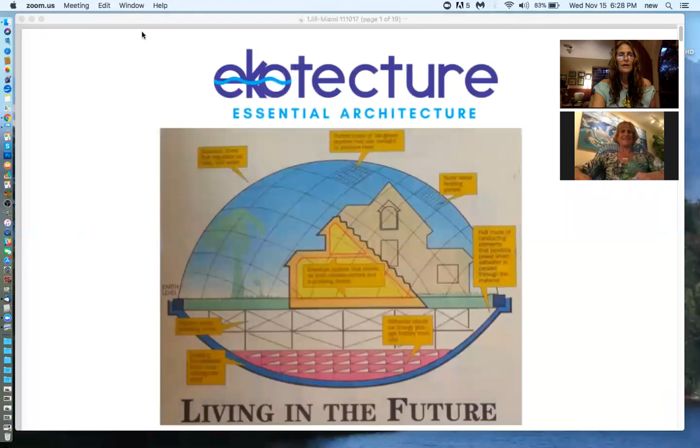They may be a little far out. Well, let's go ahead and look at some pictures, shall we? Please, a picture's worth 1,000 words. Okay, yeah, there's simple drawings right now, and I can show you some models as well. Great, I'll go through the screen sharing process here. Just give me a moment.

Let's see. View full screen. There we go. Okay, so I'll let you go ahead and just talk us through this, and you tell me when to move the slide ahead. What a beautiful picture, just looking at the details in this. Yeah, well, unfortunately, I can't read all the writing, but I'm just going to give you an overview without being able to read it all anyway.

So this is an alternative construction for the future of humanity and the planet. And I'm calling the individual homes eco-arcs. So they potentially involve all of the alternative energy systems that contribute to the whole: solar hot water, gravity geothermal, gray water recycling.

Black water recycling, that is taking the toilet waste and creating a usable fuel from that, or creating a usable fertilizer for the internal garden, because there's a garden which feeds the entire system inside of the house, as well as an aquaponic system which provides potentially protein for the entire house.

What you see on the diagram, if you want to point to that blue line that goes at the bottom of the hull of the boat, I'll call it, the blue line there is actually a water jacket. Okay. So the salient feature of the boat, of the ark, is that it floats.

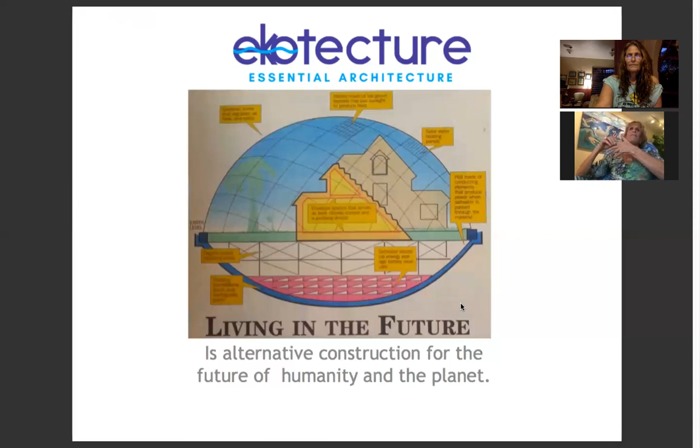Let me see if I can go the right direction here. Is that the right direction? Let's see. Well, is that the second slide? Does it say?

My architect of recent years has designed these houses to be hexagonal. My husband specified that they be elliptical, but my architect of the last couple of years designed them in a hexagonal shape modularly, with each of the components being hexagonal. Basically what each EcoArc does is it provides energy, conditions air, generates pure potable water, recycles waste for fertilizing garden and for cooking gas, and provides safe and comfortable shelter, as well as growing healthy, fresh food, plant and protein based, including an internal hydroponic and aquaponic system.

Move me in. Move me in. Move us all in. Move us all in.

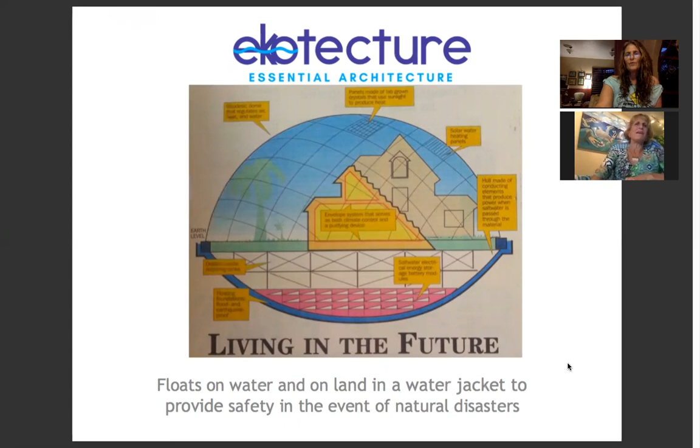So we have our same picture again that we had at the beginning, but living in the future, floats on water and on land in a water jacket to provide safety in the event of natural disasters. Here's pictures of all the natural disasters: tsunami, hurricane, tornado, flood, volcano, earthquake. And this house would be resilient in this kind of setting.

Yeah, the potential is there. Let's just say yes. The future is limitless, and we can design to protect against all of this.

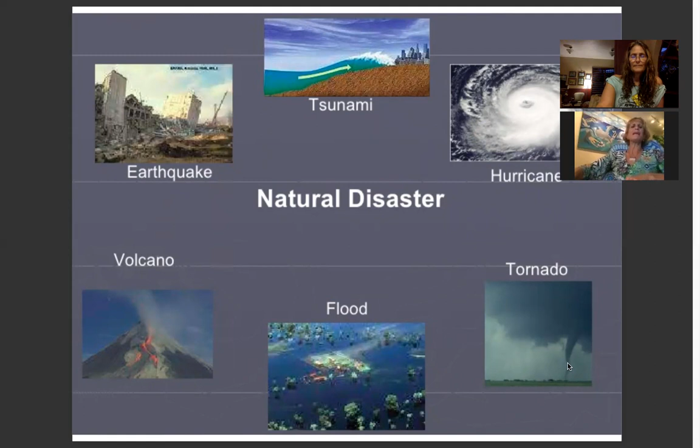This one says, Ekotecture utility systems are all based on natural systems without using combustion or friction. That's quite a statement. What you're seeing here is a cross-section, a plan of the hull of the boat, of the hexagonal one. Those lines you see internally are a series of tanks. If you look very closely, you'll see the hexagon within them. It looks kind of like a honeycomb, really. Exactly, and that's what it is. The honeycomb, of course, my husband said it was the strongest way of constructing, a hexagonal construction.

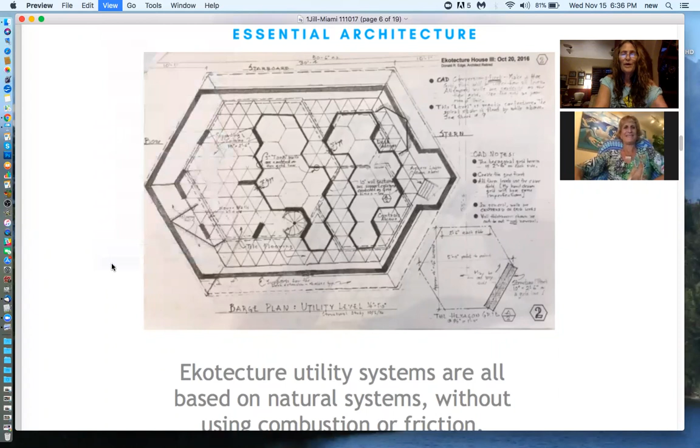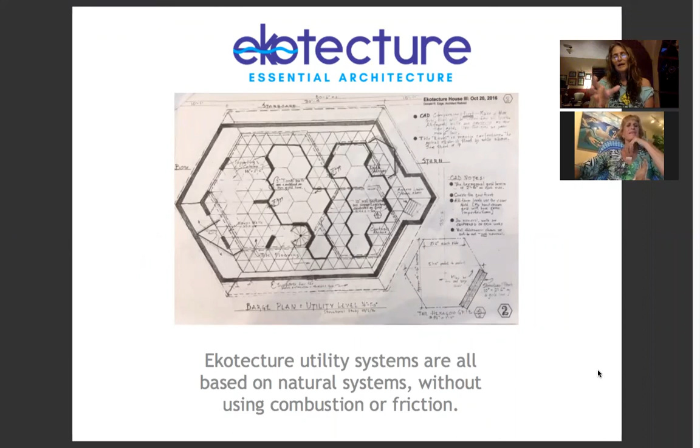So I had said this is like a honeycomb, which is very interesting. Correct, and a man can walk in through there to check all the tanks. There's the height for a man to walk through, and also the passageways. I'm having one of those ways of looking at this image where I can see it from several different directions - it's got some kind of a 3D, really neat quality about it.

So this shows some subsystem schematics. I just wanted to throw in a couple of the schematics so you get to see the hexagonal shapes of the tanks in the hull of the boat. They're very simple. You also get to see in that first drawing a double shell envelope - my husband's first invention, the gravity geothermal envelope. He put in a double envelope - if you notice, it's double walled. And another diagram for, I believe, an airflow diagram.

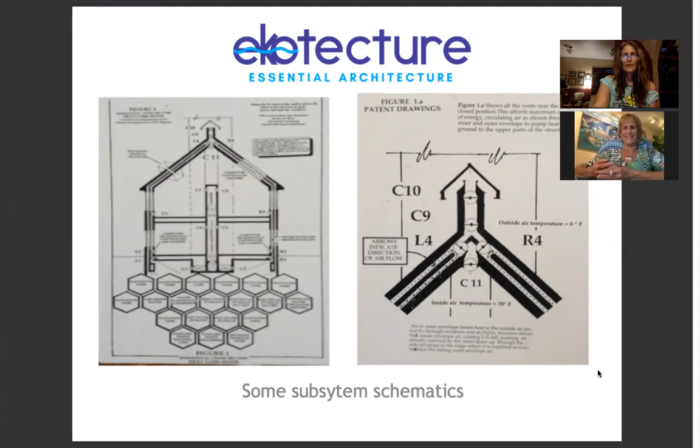And the name of this system is called Ekotecture, with a K - Ekotecture. It's .com, Ekotecture.com. You can also like me on Instagram, and you can go to the Ekotecture page on Facebook.

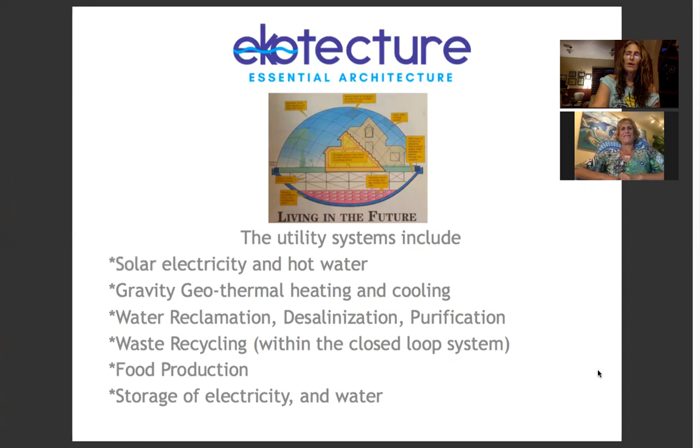Ekotecture, that's right. And I think there's a lot of other people doing amazing things who could also combine ideas with your system or learn from it or adapt it. Even though it'd be fun to get a whole community going, set up this way as an innovative model. Yes, ma'am, I can agree.

It can look, function, and feel like a traditional structure, but includes unseen unique features - no moving parts or connection with the utility grid. Very nice, lovely home. And nobody would ever know that it was built this way. You could just be in a regular neighborhood, but your house is far more secure. Exactly, your life is more secure.

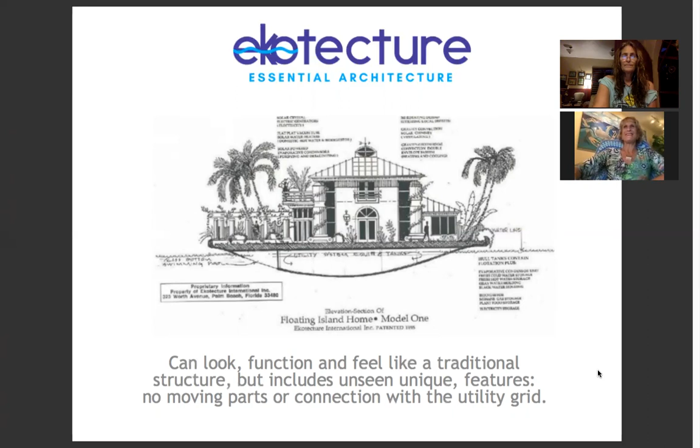Plans to provide affordable, safe housing anywhere. So these look like a little bubble, kind of. Yeah, those were the original designs - I call that the San Juan model, because a structure like that could have been deployed to San Juan instantaneously, had we had them all built, providing safe housing for those people that are suffering. You're thinking San Juan, Puerto Rico, where the hurricanes just came through? Exactly, yes, or Dominica, or many other places.

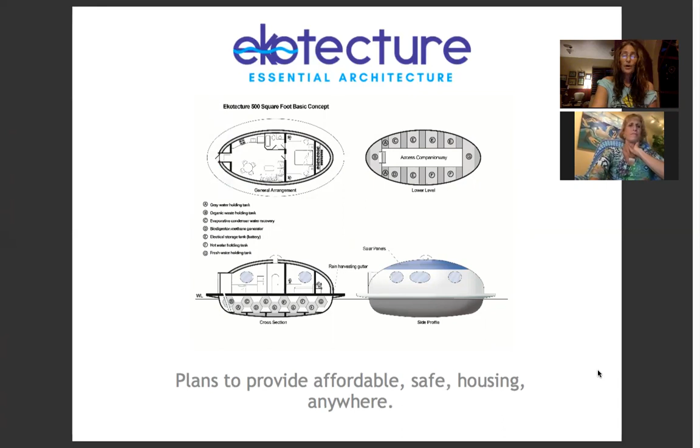And so this Ekotecture, Essential Architecture, is also a database of the new benign utility infrastructures of the system - easy to use, accurate, accessible, and delivers everyone their essentials. Basically, what's going to happen is that we're going to have to capture the data and analyze the data about how each of these buildings functions, and then we can continue to make improvements as we move along. Right, because new things are being developed all the time.

I'm almost starting to picture some kind of a collective gathering where people brought together - I know of other people who have some very wonderful advanced architecture systems, and it'd be really fun to get a bunch of you together in one place. Well, maybe you could do a show with all of us and we get to share together. I think that would be great, let's do it, and maybe we can actually all meet. Yes, I invite you all to my home. And even virtually is great, because I love it.